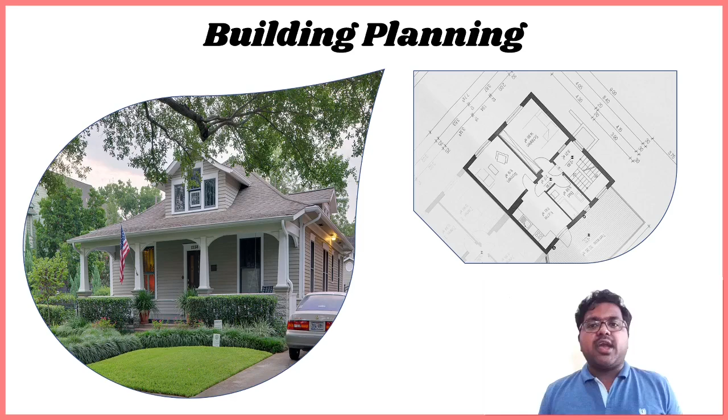If we see the main objectives of building planning: first, we will explain the criteria for site selection for a building, whether it is a residential home or any other industrial or other purpose building. Next, we will know the laws regarding these building plans, whether municipal, state, or central laws regarding buildings. Then we will know the basic principles of building planning, and at last we will discuss the basic requirements for residential buildings.

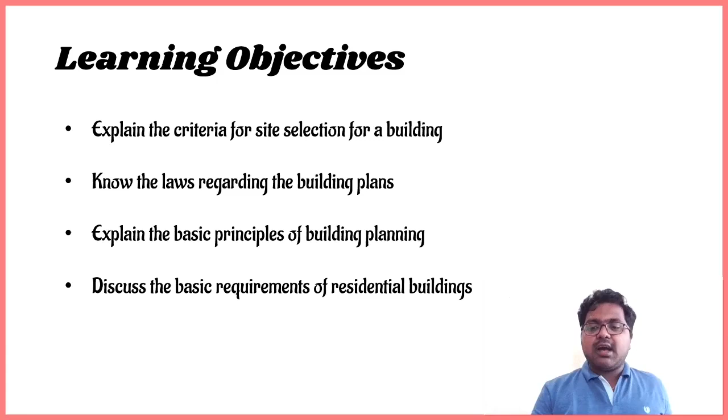So if we see the first one, which is site selection, we must keep certain important considerations in mind while selecting the site. The first and foremost is that the site should be located in a fully developed or fast developing region or community, so that we get all the facilities required for our habitation.

The second consideration is community facilities. Whenever we select a site for our residential building or any other purpose building, it should accommodate all community facilities. These may include public facilities like police, fire protection, street cleaning, waste disposal; sanitary and home facilities like water supply, electricity and drainage; as well as facilities for children's development and livelihood like schools, markets, banks and hospitals—everything should be present nearby. Last but not least, public transport facilities like bus stand, railway station, and airport. If all these community facilities are satisfied, then our site selection is good for construction or for our purposes.

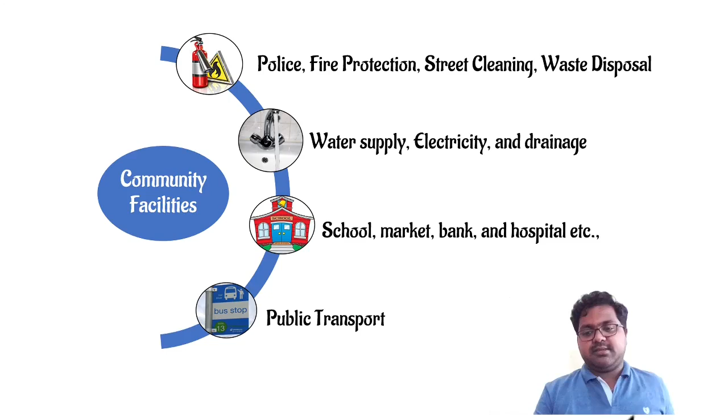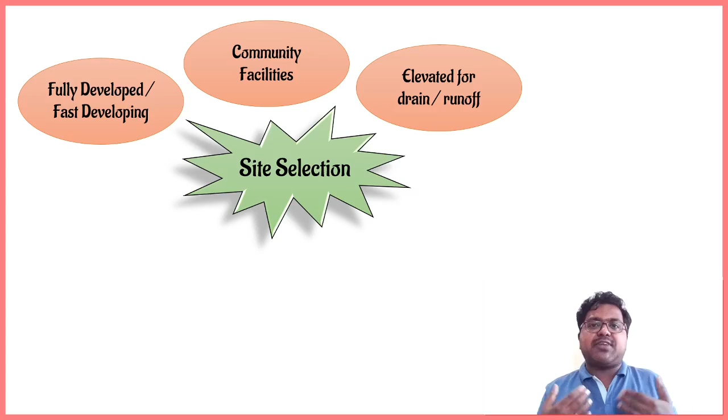The next consideration is elevation for drainage or runoff. Whenever there is a waterlogging problem, like when a flood comes or heavy rains occur, the site should be elevated for easy drainage and good runoff. Otherwise waterlogging problems will occur and we will suffer afterwards. So it should be elevated.

Then next is healthy environment. Whenever we select a site, it should be free from pollutants, a pollution-free environment that is good for health. If we select a site nearby industries, it is not preferable because it is not a healthy environment. So if we select a site in a community which is peaceful and pollution-free, then it is good for health.

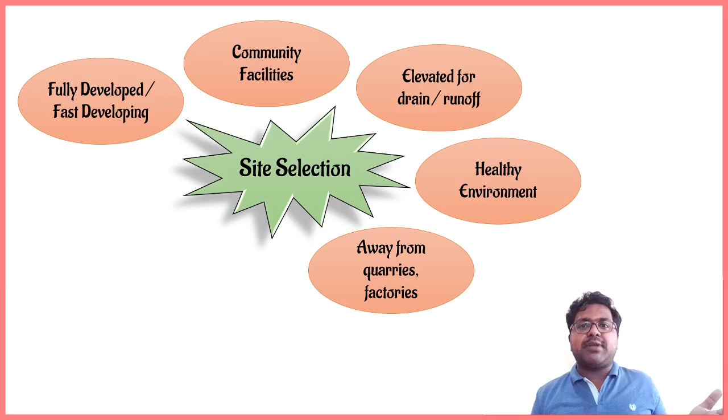The next consideration is to stay away from quarries and factories. Whenever there is a quarry located nearby the site, we should not prefer that one. The same goes for factories, as they may release pollutants or poisonous gases, causing problematic issues nearby. So avoid such site selections.

The next one is provision for future expansion. When we are planning for expansion in the near future, we should select a site which is feasible for extension later. And the last consideration is legal and financial aspects—whenever selecting a building site, we should ensure it is free from legal issues and good in terms of financial aspects.

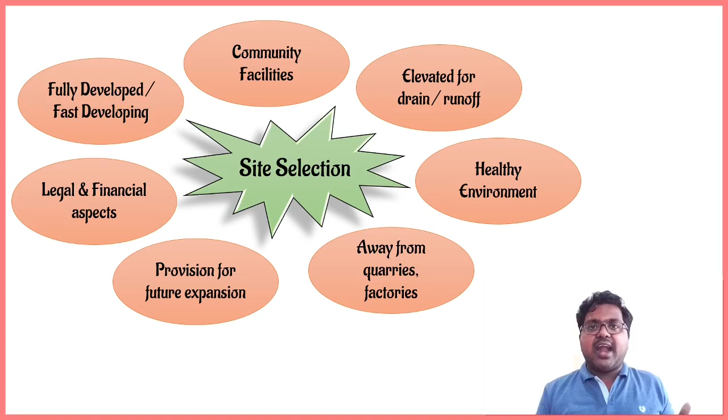Then the second one is building bylaws. So what are the laws we have to follow for the building planning? According to Indian standards, we have IS code 1256 1967, which is the code providing building bylaws for building planning and construction.

So from this code, the main building bylaws objectives are to ensure orderly growth and prevent haphazard or unplanned development. Next is to afford safety against fire, noise, health hazards and structural failures. Means both pollution as well as structural failure, everything needs to be kept in mind, and we should follow the building bylaws. And the last one is to give guidelines for owners, engineers and builders or architects regarding the building construction.

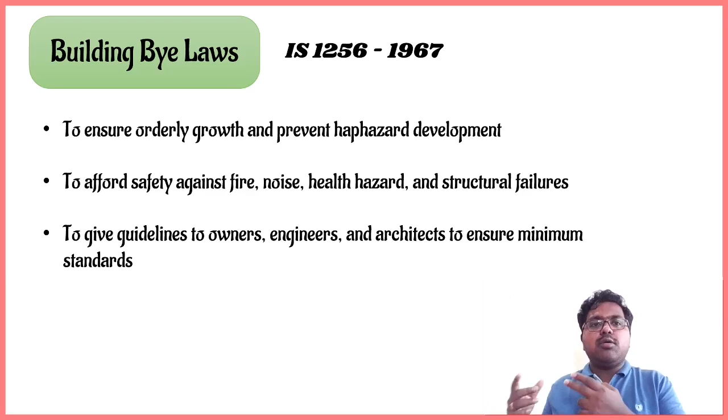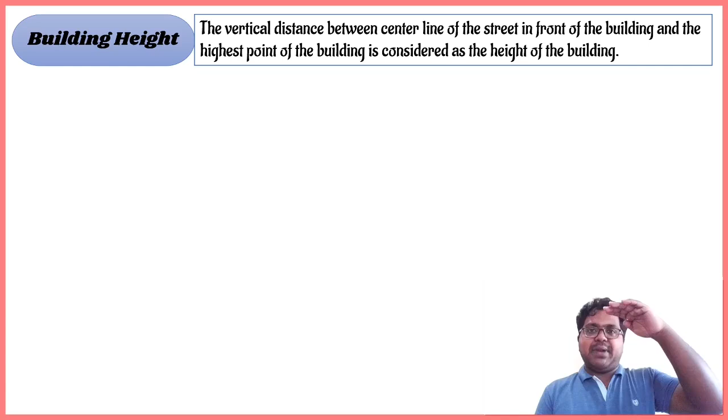So before discussing these building bylaws, let us learn some terminology regarding buildings. Here the first one is building height. It is the vertical distance from the center line of the street to the top of the building. And the next one is building line. It is the horizontal distance between the permanent portion of the building and the center line of the street.

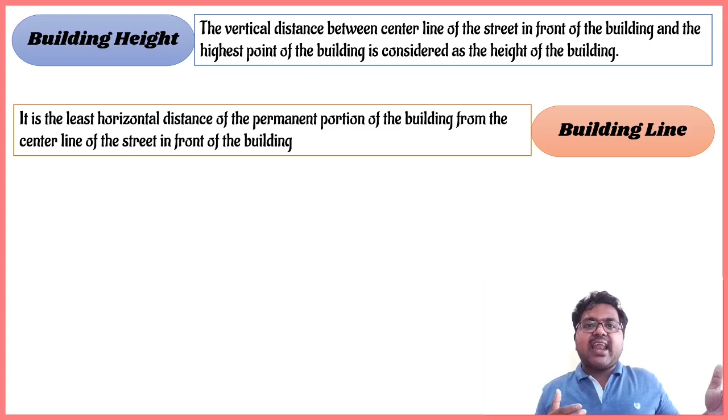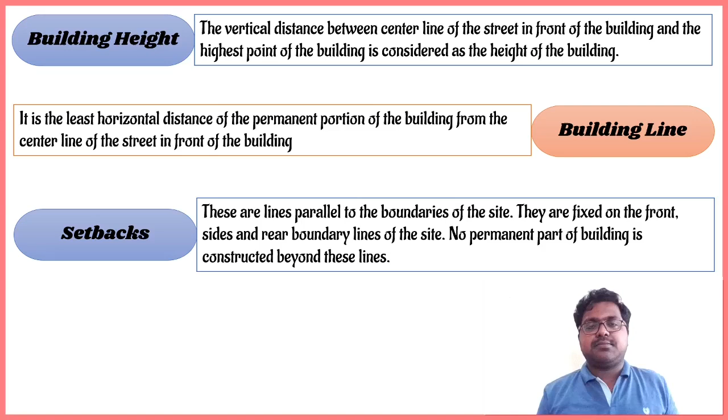And then the third one is setback. These are the parallel lines or boundaries to the site which are fixed in front, sides and rear to the boundary of the site. Usually permanent parts of the buildings are not allowed to be constructed beyond the setbacks. And the next one is built up area. This is the area which is covered by the building above plinth level. It is also called covered area or built up area.

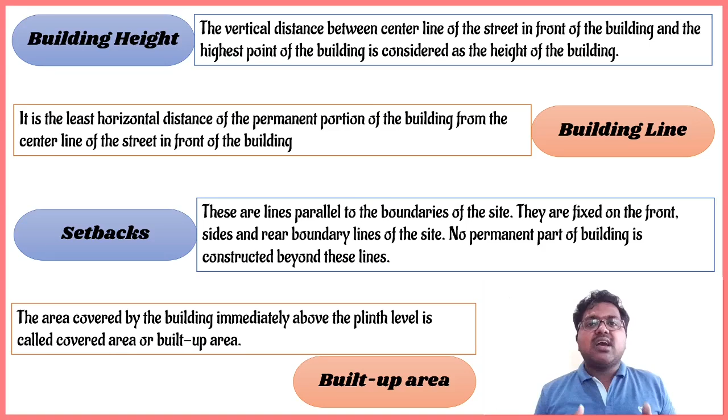Then next, floor area ratio. It is the ratio obtained by dividing the total area covered by the floors by the area of the plot. FAR is represented as sigma, that is the summation of the covered area of floors, divided by the area of the plot.

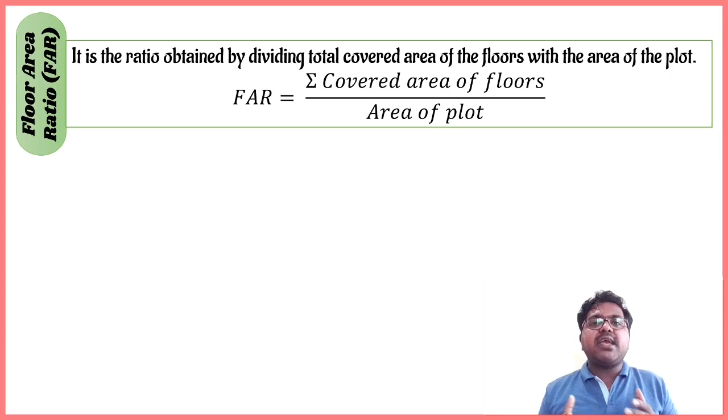Then next, floor area. It is equal to the plinth area, but we remove the area covered by walls and columns. So it is only the floor area available inside the building, including hall, kitchen, bedroom and any other places like stairs, storeroom, etc. All the floor areas added together give the floor area: plinth area minus the walls and columns.

The next and last one is sanctioned plan. Whenever we are going to construct a building, we must get a plan from the design engineer, an architect or licensed engineers. Those licensed engineers will submit the plan for approval to the government or local authority. The local authority will approve the plan and give it back for us to construct the building. So the plan approved by the local authority is called the sanctioned plan. So these are the basic terminologies involved in the building bylaws.

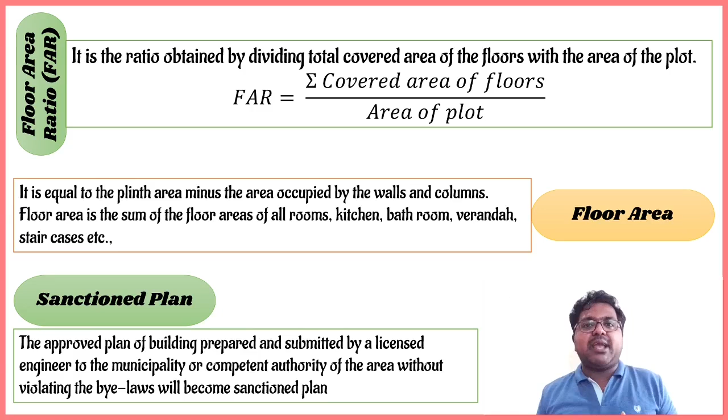Now let us see the important building bylaws we should follow regarding the construction of a building. We categorize these building bylaws into two types. The first one is important building bylaws, which include distance from power supply mains, exterior open spaces, as well as the heights of buildings.

And the second is building bylaws for requirements of buildings. It includes plinth area, habitable rooms, kitchens, bathroom and water closet conditions, storeroom conditions, staircases, parapets and compound walls. There are regulations and laws for all these aspects. Let us discuss these important bylaws and bylaws for requirements of buildings in the next video.